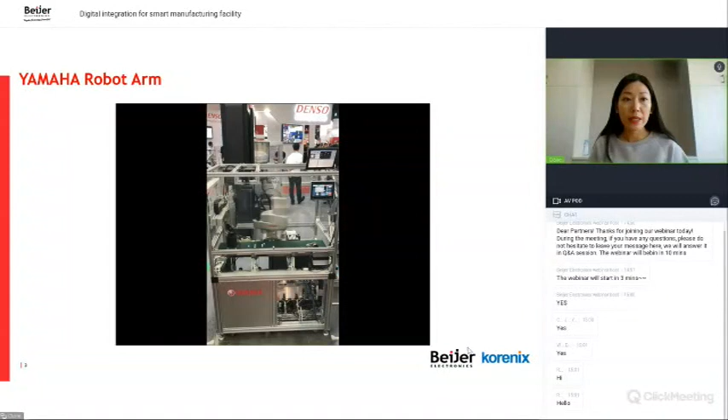This video shows that the conveyor belt keeps sending something like a tablet, and the Yamaha robot arm can grab the object at a very fast speed and put it on a small plate in order. On the top right-hand side, there is a Beijer HMI connected to the robot arm.

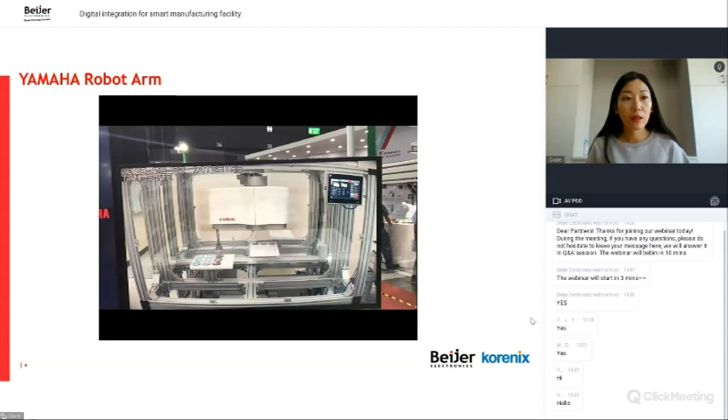And this is another one. This robot arm rotates 360 degrees at different angles, not just fast, but positioned precisely.

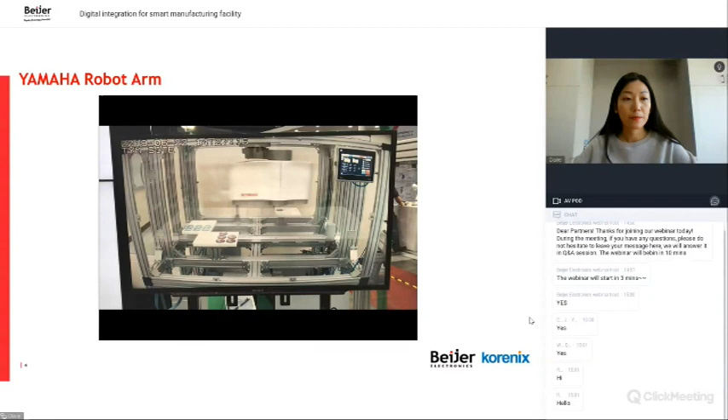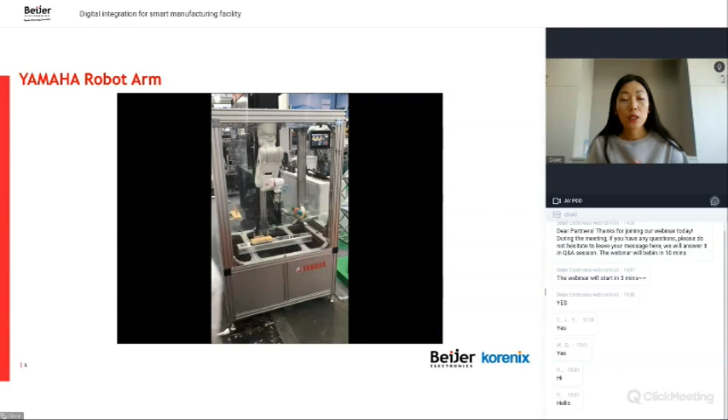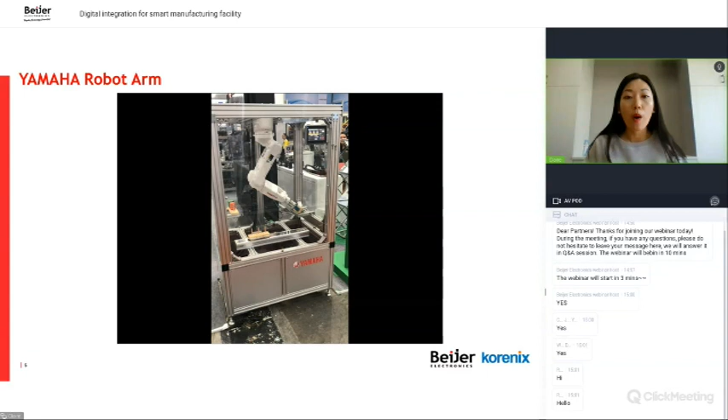And this is another robot arm model from Yamaha. It shows a bit more complicated movement. The object is not placed on a flat surface, but on a stick at around a 45 degree angle. The robot arm needs to catch each one and put it onto another stick, one by one.

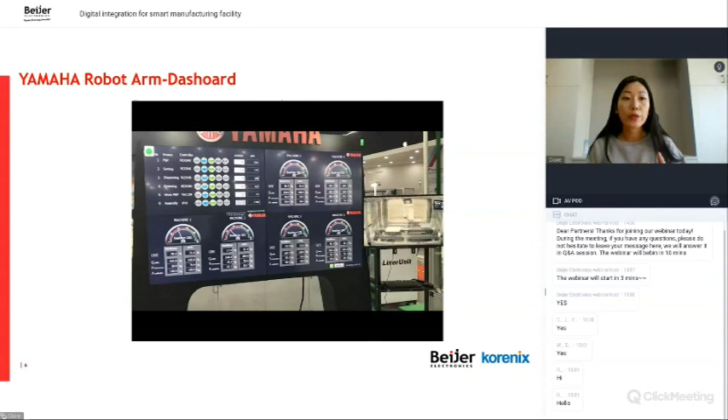And this shows how their dashboard displays machine monitoring data. For example, machine real-time and average OEE, quality and performance, different controllers, parameters, speed, and more.

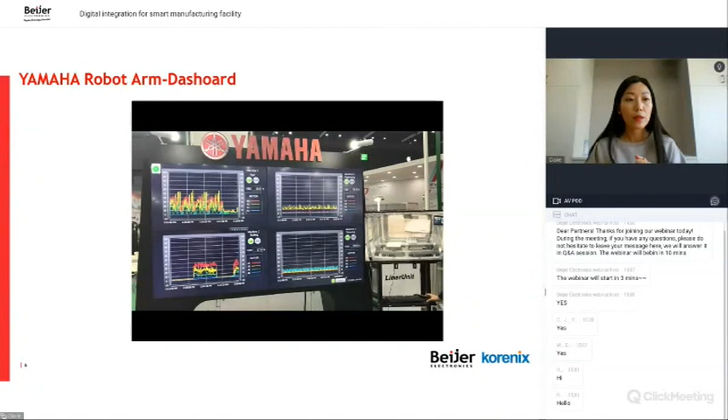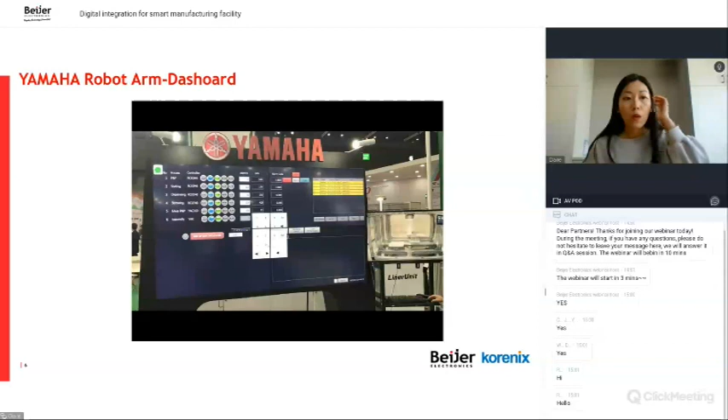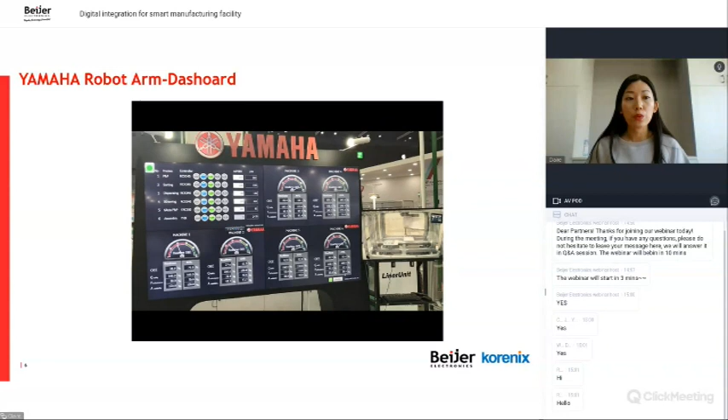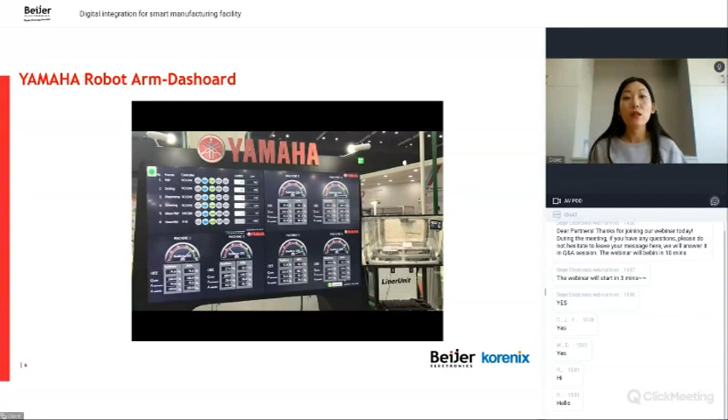These are all of our cooperation cases with Yamaha. There are 2 problems robot arm systems usually face. One is that each production line needs to catch different objects, so the speed and angles are different, requiring a fast tool to adjust directions and speed quickly. The other problem is that production lines usually run 24/7 non-stop, so the system needs to monitor in real time and get immediate alerts to prevent emergency issues.

So customers come to Beijer for a solution. Here, Beijer HMI connects to the robot arm easily with just one LAN cable. We also use embedded software to customize protocols while offering VNC for remote monitoring. Unlike traditional HMI which can only do data display and log, Beijer's HMI software comes with the .NET framework and C# script, so we can develop specific protocols for Yamaha robot arms. This enables the robot arm to do adjustments and data logging while operating without an instructor's advice, saving another cost for the end user. Customers can also develop special recipes and parameters with the C# script, which is flexible for everyday changing factory needs.

Besides, Beijer's HMI has VNC functions so the machine can be controlled and monitored remotely via a VNC application. Productivity is further increased by allowing operators to adjust positioning and filling speed for the recipe needed. The machine sends feedback like motor temperature, actual torque and position of the motor, energy consumption, and more. The audit tracking function enables verification of information, such as what operation was conducted by who and when, as a standard feature. It can analyze defects and provide feedback during operation, which is important for improving the overall facility operation rate.

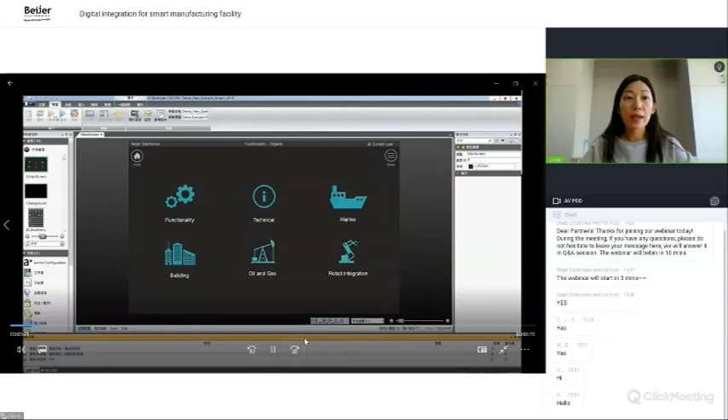Let me share another video here. This is our software developer interface, called iX Developer. Here it shows some examples by models and functions as reference. After you click the executions, it shows different examples by the functions, by the segmentations, as reference for you to check.

And this is the dashboard. It shows objects like the button, switch, slider, or bar charts and trends, depending on your requirements. The style can also be customized. There's also a keyboard here for you to adjust the numbers, or when you use the slider, the numbers will show and adjust accordingly.

And this is the dynamics, for example color dynamics. If you raise the bar to 7, it shows level 7, meaning orange color. Level 9 means green, and level 2 means blue color. And the temperature can also adjust accordingly - you can change it to Fahrenheit or Celsius degrees.

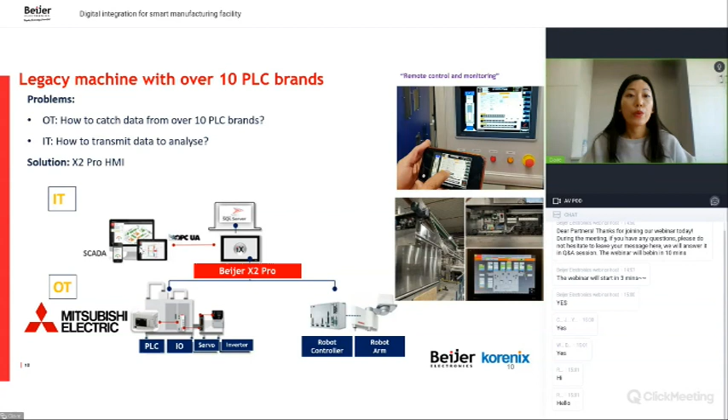And after catching data, another problem comes: how to transmit the data to IT or cloud. Most IT systems cannot handle proprietary protocols, and there are hundreds of OT protocols that are mostly proprietary. Many of these are from very large, well-established brands like Rockwell, Siemens, Schneider, and Mitsubishi. They usually require another gateway device to transfer the data from OT to IT. But remember, end users are on a budget, so they don't have the ability to add another device.

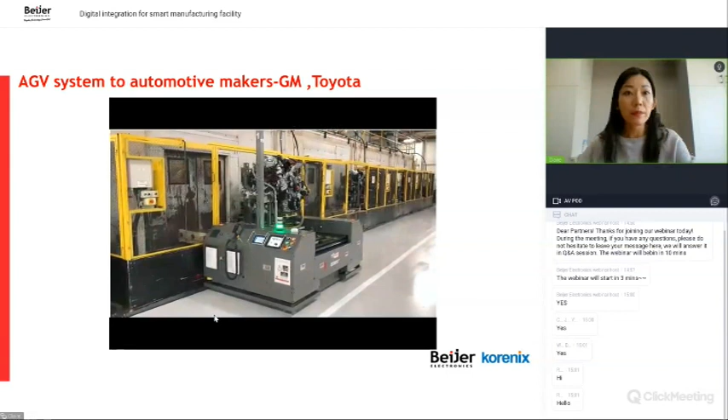This case is an AGV system Beijer co-worked on with a system integrator from the United States. The integrator offers customized AGV systems to automakers such as GM and Toyota. You can see the finished engine placed on the AGV car and moved to the next workstation. On the car, they install Beijer's HMI and use our software to customize a specific route for the AGV, giving it flexible navigation.

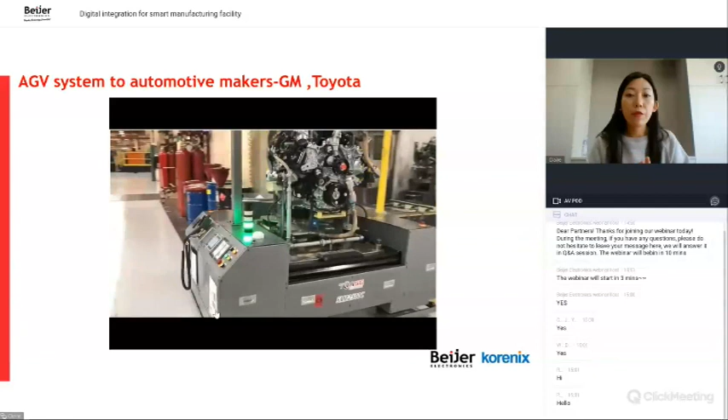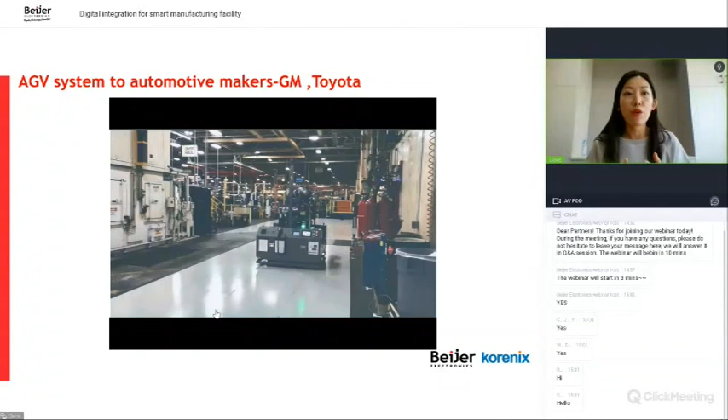Car manufacturers are always at the forefront of IIoT initiatives. In a $1 trillion industry with narrow profit margins, they have huge pressure to offer more efficient solutions. This customer was looking for a new and improved system to avoid magnetic tape on the factory floor for navigation. They needed a system that could timely adjust routes for the AGV, avoid obstacle interference, and save maintenance time.

They found that Beijer's one software platform can customize a specific route for the AGV. It offers a safe way to move heavy parts and materials between different workstations, and can easily adjust new routes through just one platform. So they installed Beijer's X2 Pro HMI and X2 Extreme HMI on the car.

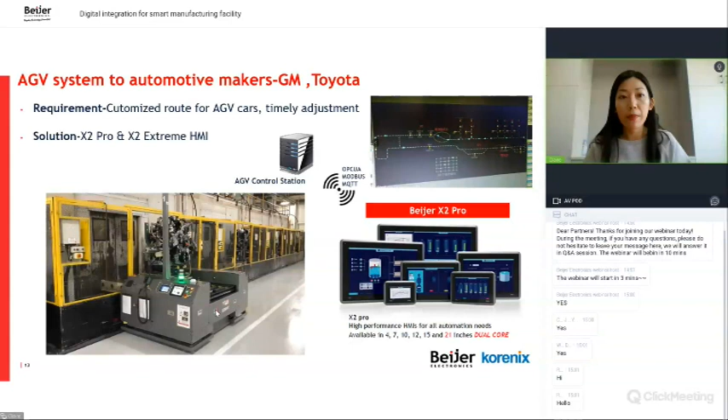As I shared earlier, Beijer's software is called iX, which is a 100% all-in-one software. From development, to runtime, to dashboard, it's only one platform. It saves lots of time for engineers doing programming. The software is Windows-based, so customers can reuse the same code over and over again. You don't need to create code for each project. This means you can deploy exactly the same control application on different hardware devices.

You can easily move and reuse the PLC code between different devices, which makes programming easy. Besides, Beijer software comes with the .NET framework and C# script, so customers can customize their own routes for the AGV.

Every time the next batch of car engines is ready to be assembled, the flow of the assembly line will adjust based on the size and weight of the engine, as well as the distance between each station, to find the most efficient direction. It can also do navigation such as reflective, laser triangulation, natural surrounding navigation, or inertial spot tag. It can check status updates, control the navigation, and get alerts for maintenance, shortening the response time, all directly shown on the screen.